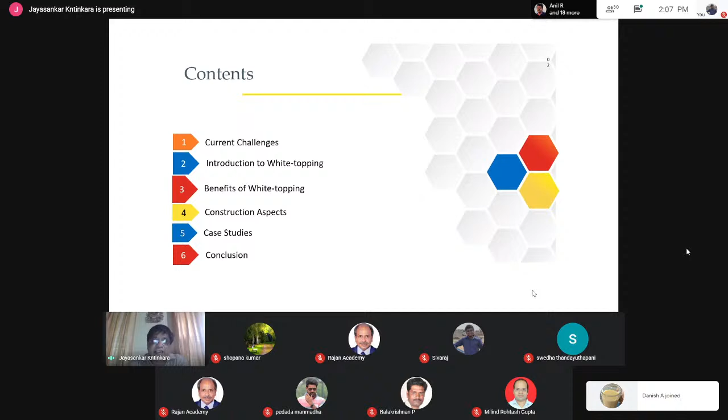So if you see the current challenges in construction, especially in the road sector, especially city roads, this is a common problem. After every rainfall, you've seen this - though I've shown here a Mumbai pothole, it is applicable to every city, whether Bangalore, Chennai, Hyderabad, or any city. After a heavy rain, one of the major problems is potholes.

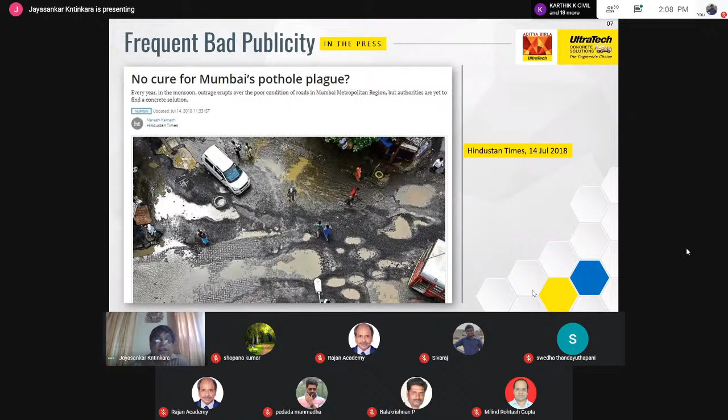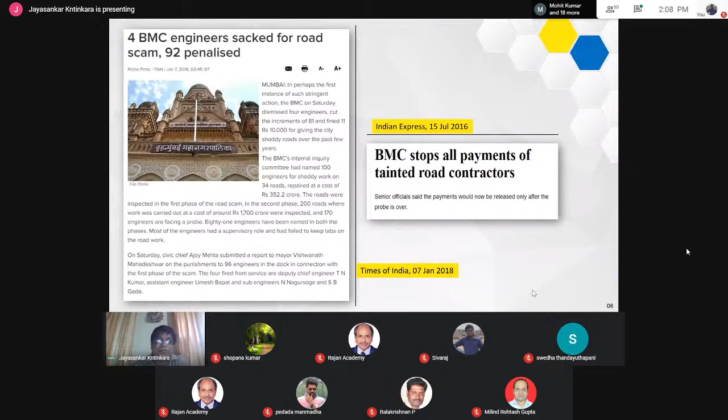The problem doesn't end there, because when it comes to potholes and bad roads, there is a lot of hue and cry, and the bureaucracy asks questions - why this road, laid just 1 year or 1.5 years back, has gone to such a bad shape. People protest because they have to commute through these roads. So a lot of protest takes place, traffic becomes very slow, there may be some accidents, and some may even be fatal.

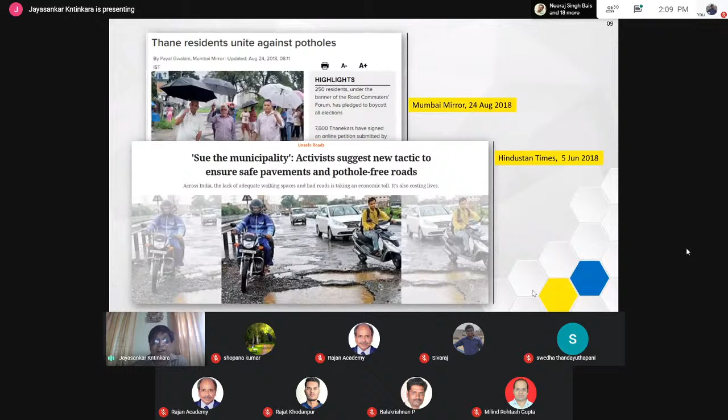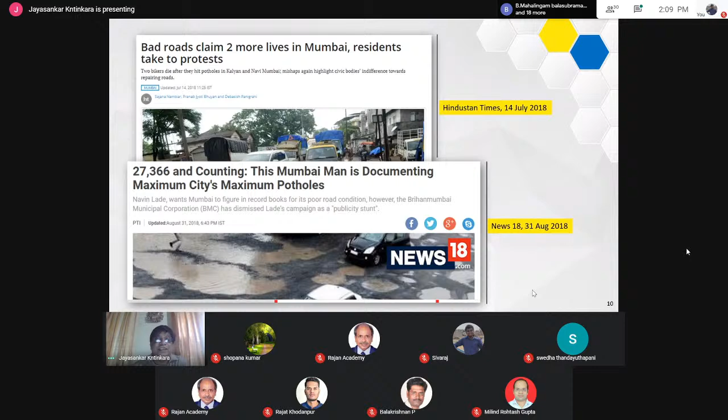Adding to this problem, many times people go to court, and the court will ask the bureaucracy. Recently we have started a new trend: people are counting the potholes, and they have to give a report on how many potholes they have filled to the court.

So if you want to make a case for a better road, first is the basic problem in city roads because of potholes - it's a public inconvenience. When potholes are there, traffic gets slow because drivers have to either avoid the pothole or slow down to take it through. Second thing is accidents, and some may be fatal. So this creates a lot of problem for the public.

Another big problem for the public is, for example, some 10-15 years back we constructed a house and we might definitely see that our house is above the road level. But due to very frequent overlays happening in the city, the road level goes up and the building comes down. This was clearly witnessed during the 2015 floods in Chennai. Many apartments constructed 15-20 years back, or individual houses 20 years back, were maybe constructed 1 or 1.5 feet above ground level, but today they are about 1.5 to 2 feet below ground level. So during the floods, they had a lot of problems.

Nowadays there is a new technology coming from a Haryana based company - they are coming and lifting the houses to avoid this problem. So this is one problem, the public inconvenience.

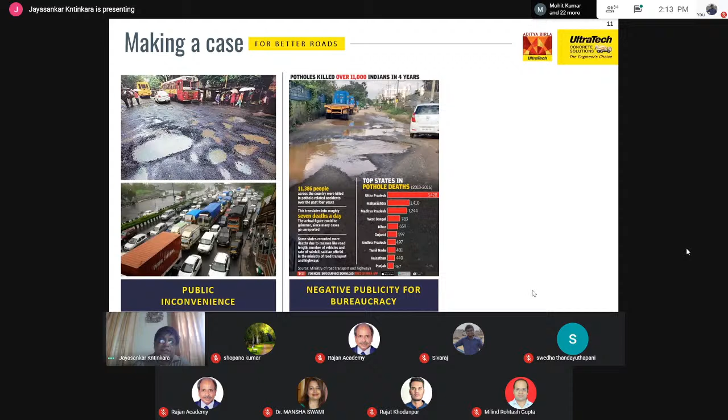After every rain, there are a lot of complaints about potholes. The third major problem is the recurring expense for the government exchequer.

In one of the meetings we had with some ministers, he was asking his chief engineer how much they spend per year for maintenance of a bituminous city road. So he told some 300 crores. Then the minister remembered, no, it's not 300 crores, it's much more than that. So finally the number came to about 800 crores because of some other reasons also they have spent something.

But this money, if constructed into new roads where maintenance expense is less, you can build more and more infrastructure. So recurring expense on maintenance of the road is also a concern.

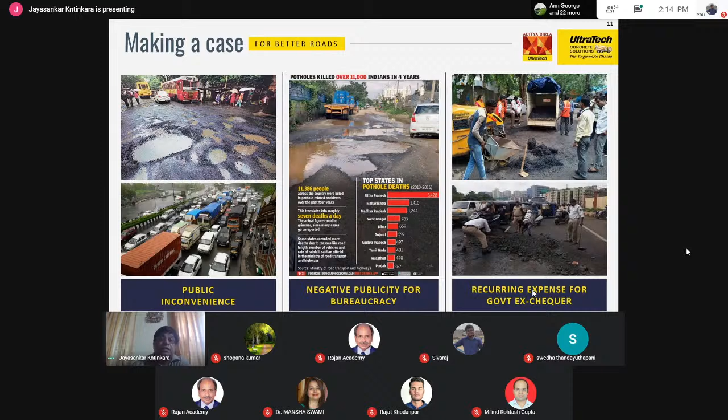So with this concern, I'm going to give a solution for especially the city roads, which is the introduction to white topping, and why white topping is required.

So if you see a bituminous road, you have a subgrade, and then you put the asphalt, bituminous concrete over it. In a rigid pavement, you have a full concrete road. But the problem with the full concrete road, why people didn't go for rigid pavement, was because the cost was very high.

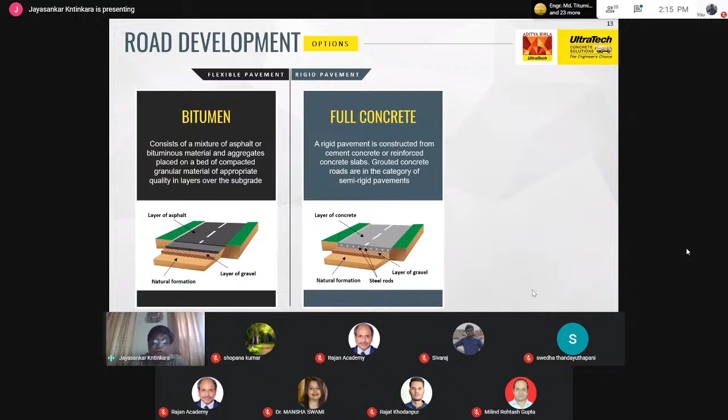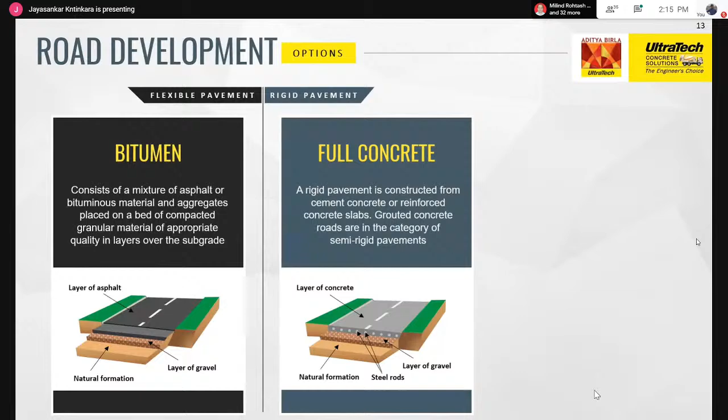The initial cost is high, and as I told earlier, political parties come for 5 years and look into not the quality of the road, but how many kilometers they can lay with the budget they're having. So here is a big disadvantage: if you build a concrete road you can lay say 1 kilometer, but with the same budget as a bituminous overlay you can put some 3 or 4 kilometers. So that is the disadvantage.

And bituminous overlays are done very fast, whereas a full concrete road takes a huge time to complete. So is there an alternative? Because city roads, due to water logging and other issues, bituminous roads are a problem, but full concrete roads have disadvantages too.

So this technology that has come is an in-between technology called white topping, where if you have a good layer of asphalt - because of overlays, sometimes in many roads, especially at the center of the road, you can get almost 3 feet, 4 feet of asphalt road.

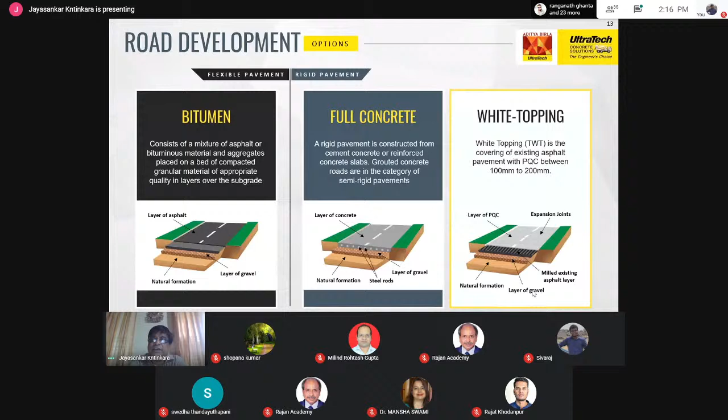So wherever there is a good thickness of asphalt road, can we have an overlay of concrete which is of lesser thickness and with no reinforcement? Normally a concrete road will have reinforcement. And that is how this white topping technology started.

Ultratech's vision from the beginning is to be the leader in building solutions, meaning we can be a solution provider. So from a small house construction to many bigger constructions, we get involved wherever cement and concrete is there. White topping was one such technology.

We thought we will take it up, create awareness about this technology, and promote it. That's how we started the first demonstration project of white topping in Madiwala, Hosur.

Then we did a demo project in Chennai for Velachery Road, then one demo in Banjara Hills Road at Hyderabad, and we had some roads constructed in Jaipur. Today this technology is catching up, and especially in Bangalore, it has become a household name: white topping.

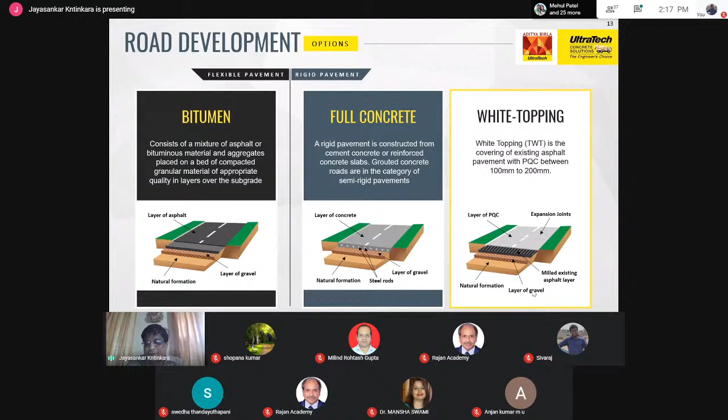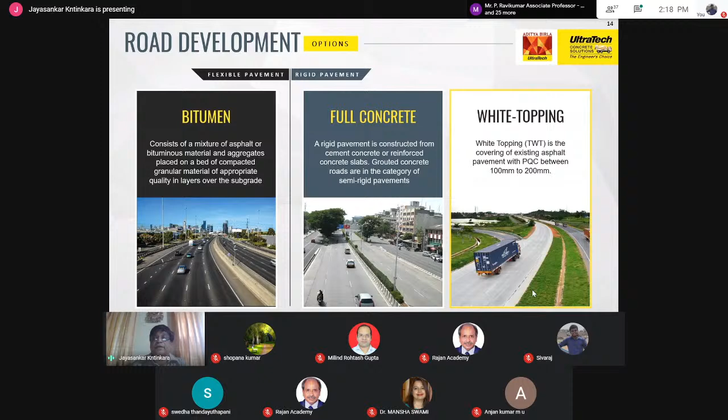So you have guidelines, IRC SP 76 2015, which defines white topping. White topping is covering the existing asphalt pavement with PQC, pavement quality concrete, and can be used where traditional asphalt pavements have failed or deteriorated. You don't have to remove the full asphalt - take it as the base layer, and over that you put a thin concrete layer with short panels.

Mainly, if you see the difference between a concrete road and a white topping: normally concrete roads have long panels, typically 3.5 meters wide and 4 meters long, done with a bigger joint. Whereas here, it is all 1 meter by 1 meter slabs with lesser thickness.

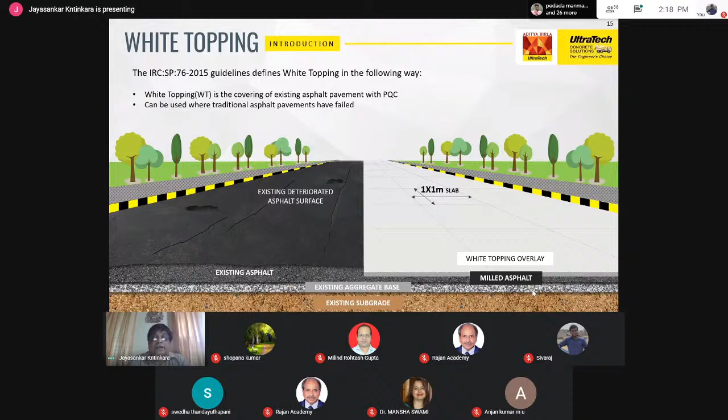So this can be easily done, and there is no reinforcement here. The existing road is utilized as a subbase, and the asphalt layer can simply be milled, and a new concrete overlay is constructed on the milled asphalt surface.

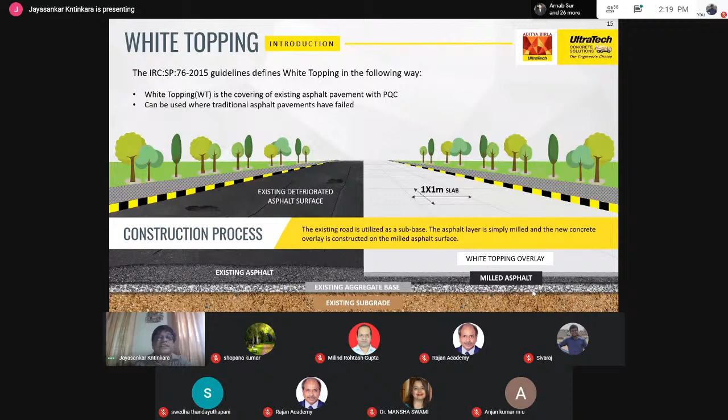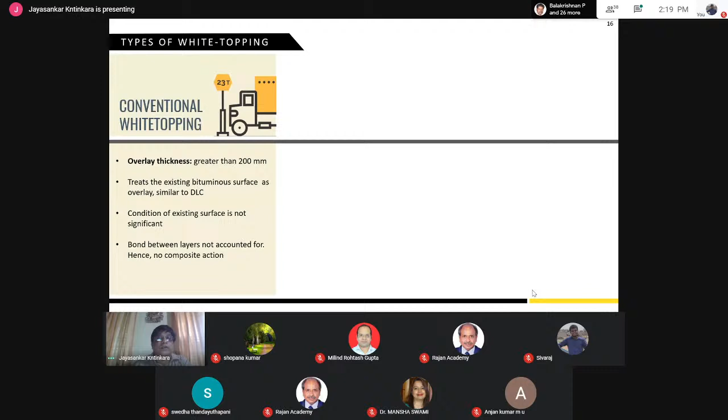So there are three types of white topping. One is conventional white topping, where the overlay thickness is greater than 200 mm. The commonly used white topping nowadays in city roads is thin white topping. Conventional white topping can be used for highways, like what we have used in Nice Road. Thin white topping has an overlay thickness between 100 to 200 mm, that is 4 inch to 8 inch.

The bond between layers is considered, but it's not mandatory, and not considered in the design. Earlier, it was thought that this bond could also be taken into account, but later, when the code got revised, we found that this bond is not going to be there forever. So nowadays, bond is not considered in the design. High strength concrete M40 and above, with fibers and without fibers, can be used.

And the most important thing is joints are at shorter spacing. Normally, we do 1 meter by 1 meter panels.

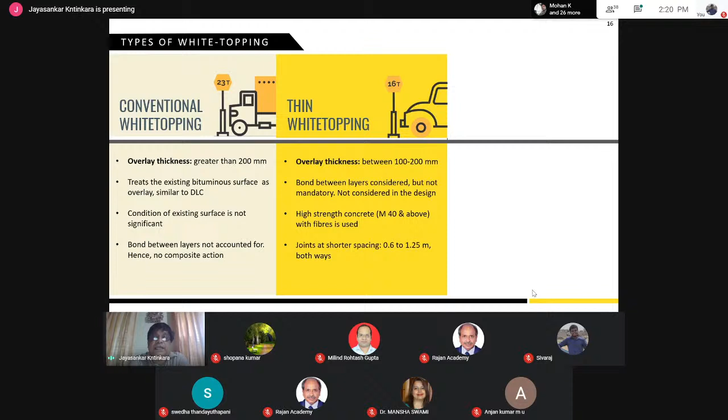There is also another white topping called ultra thin white topping, which is for light vehicles, not recommended for Indian roads. It's suitable for interior roads of a colony or similar areas where traffic is not heavy. This is less than 4 inch thick, and the joint spacing is again small - they do 0.6 to 1.25 meter based on the design.

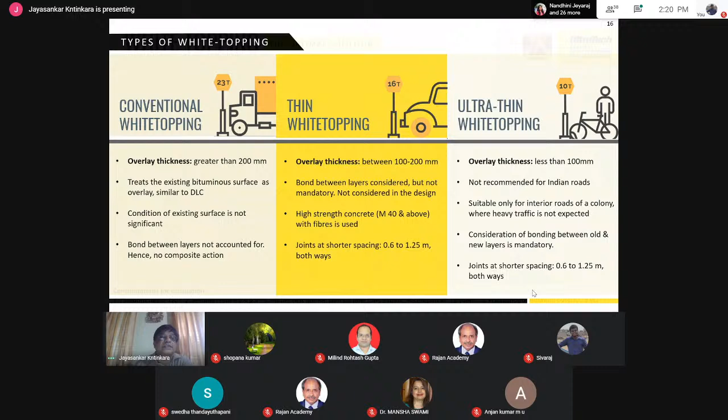Any questions so far, or shall we take the questions later?

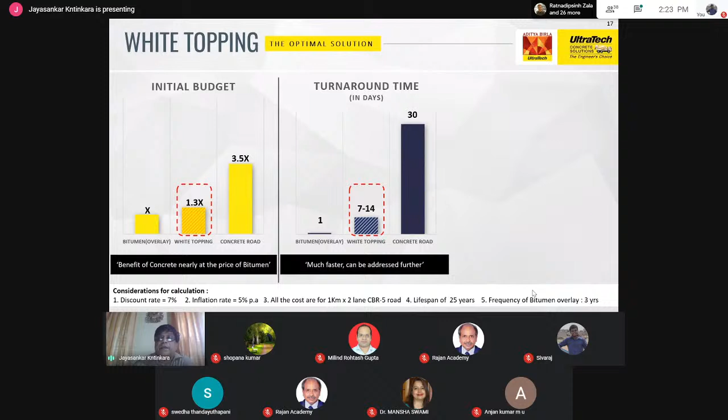But the biggest advantage of the concrete road is its life cycle cost. For example, if you take a 25 year life cycle, for white topping the life cycle cost will become 1/5 of the bituminous overlay, whereas for concrete road it will be about half of it, mainly because there is no maintenance, or very little maintenance, as far as concrete roads are concerned.

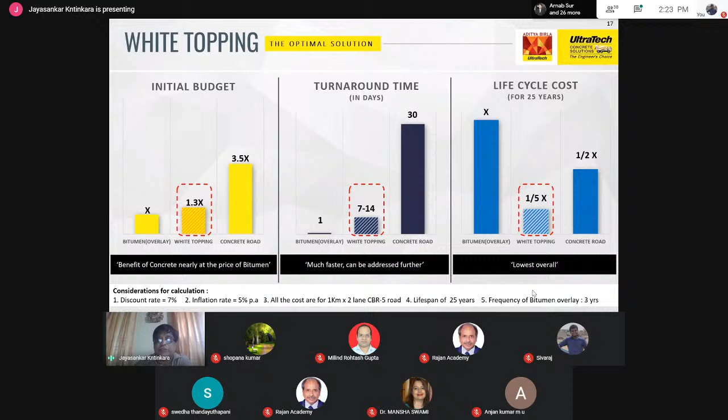And again, when I say concrete road maintenance is less, I mean a properly constructed concrete road, because you have to be very careful when you make the concrete - the PQC and laying execution should be good. For white topping, wherever applicability is there, even a deteriorated bituminous road can be used as a base.

The only thing is that we have to design it properly, taking the K value and other factors into account. So mostly, with our experience, we have seen that many roads with 6-inch white topping are normally used in all places, and it is working very well.

So how do you construct this white top road?

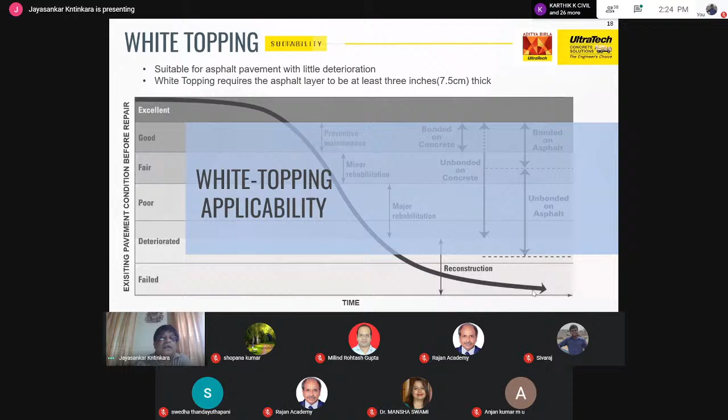First is, as I told earlier, the milling and profile correction. It's very important to do the profile correction because since we are designing a 6-inch road, if your profile correction is not good, in many places the PQC consumption will increase. So milling plays a major role in profile correction so that a uniform thickness of the road can be maintained, and wherever we find difficulty, DLC, dry lean concrete, can be put and the profile correction can be made. So surface preparation is very important so that the cost will not increase because of the higher thickness which we unknowingly will do.

Now for concrete overlay, normally we recommend pavers, and the ideal one is the slip form paver. But there are 3 methods people are using. One is they use a screed vibrator. This is the lowermost technology. We recommend 2-3 things when you do a concrete road. One, preferably we recommend RMC, ready mix concrete, where timely and faster supply can be made, and the quality of the concrete will also be better. So site mix concrete or machine mix concrete at site, we don't recommend for concrete roads.

Second, we recommend a paver, and there are 3 types people are using. One is a screed vibrator. Definitely it gives better performance, but not good riding comfortability, or the quality will not be as good as a paver. So there are 2 types of pavers available now.

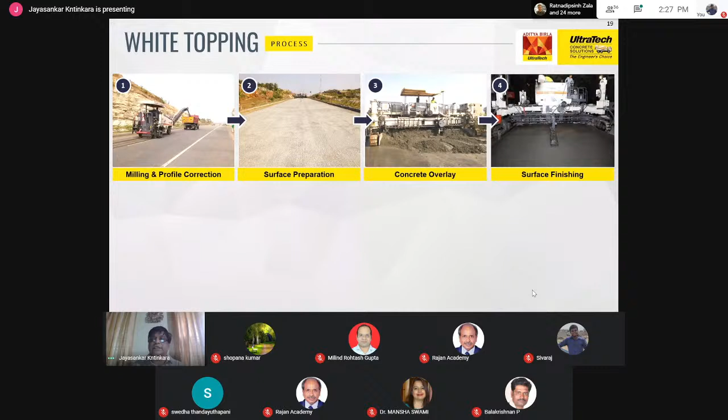The machine will also have a texturing attachment nowadays, where the machine itself does the texturing to give a rougher finish. And if the machine does not have it, we use rods with a brush to give the texturing for the concrete.

This is one of the most important parts of white topping: the groove cutting process. You should have a sufficient groove cutting machine, because as I told earlier, we are putting M40 grade concrete, and normally the 1-day strength will be somewhere around 18 to 20 MPa. So within 8 to 10 hours, you should start the groove cutting, and the grooves are normally cut to 1/3 the thickness of the concrete. So if it's 6-inch thick, we cut a groove of about 2 to 3 mm width and a depth of 2 inches. The idea of groove cutting is to make shorter panels so that any shrinkage cracks happen inside the groove and not outside.

So it's very important how fast we do the groove cutting, because if you delay the groove cutting, then you cannot have proper groove cutting. The blades will get broken very fast.

So ideally, we should have prepared with extra machines available with us in case one machine is not working. There should be an alternative machine, and more groove cutting machines are kept to ensure this process is not affected and no time delay happens for groove cutting.

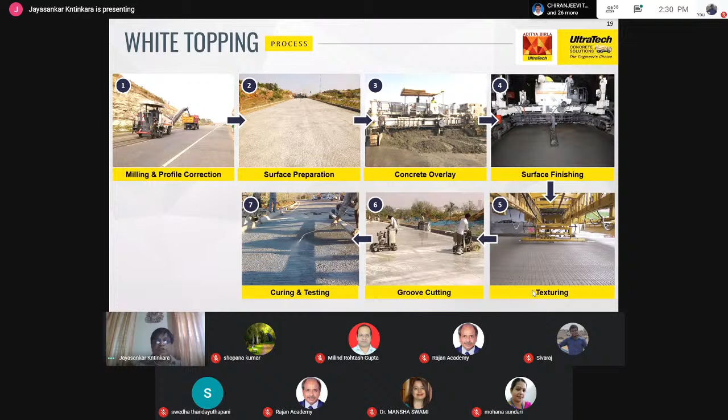So what we do is use normal curing with Hessian cloth, or in some places we use polythene sheets also, in case curing compounds cannot be applied. We immediately cover the concrete with thin polythene sheets so there is no evaporation, avoiding plastic shrinkage cracks. Finally, you have to do all the testing - concrete strength and all the things.

And finally, the road is like this. So this is a very simple method - nothing much is there. You have only PQC, no reinforcement. But if you are going for an alternate lane, for example 3.5 meters, the only reinforcement you have to provide is the tie rods to have a joint between the adjacent lanes.

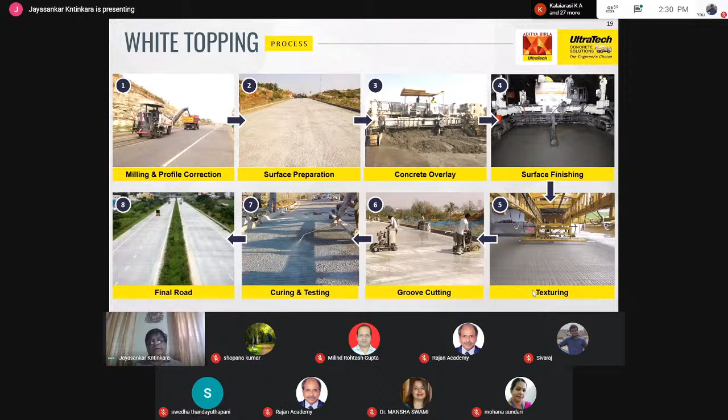Now coming to the benefits of white topping. The first benefit, as I told earlier, is the life cycle cost. The average maintenance period of an asphalt road overlay is around 2 to 4 years, but in many places we have seen that every monsoon, after the monsoon, there is an overlay, especially if it is a VVIP road.

With white topping, as we see here, absolutely there is no maintenance required, and we don't even fill the grooves with sealants, because our experience has shown that dust will fill them automatically, since there is no reinforcement along the road. So nothing is going to happen - the dust can fill those grooves and that's it.

Earlier, when we did the demo project, we were using sealants and filling them, but that had not much effect based on our practical experience. Nowadays on the roads we don't fill any sealants either. So there will be absolutely no maintenance, except in some areas if it is not properly done - some cracks, some spalling.

This has to be addressed because today we have high strength grouts and all such things available. So if there's any small problem due to improper work, you can cut out that panel, remove it, and put re-concrete, allowing traffic within 4 to 6 hours. That type of high strength grout and concrete is available for repair works also, in case we don't do a proper job and something happens to that concrete road.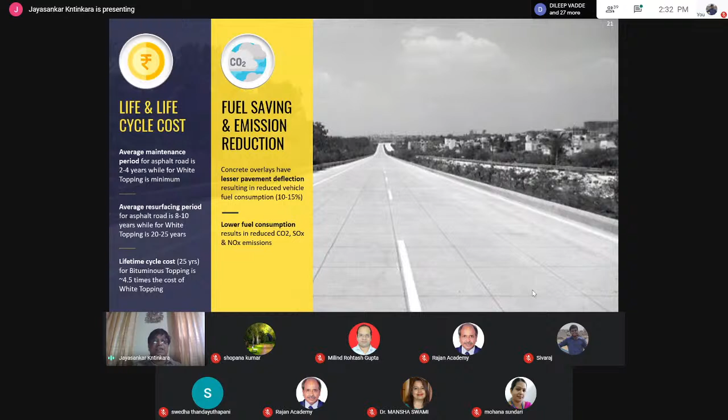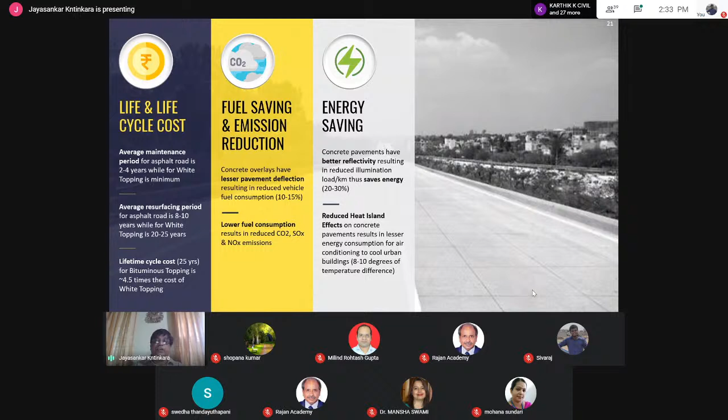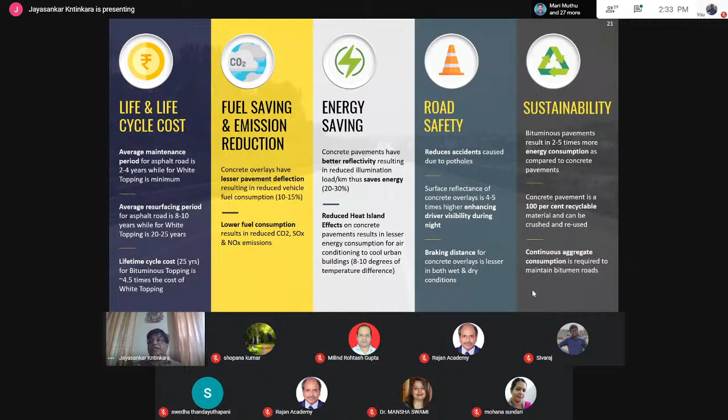The other advantage of concrete roads - not only white topping, but concrete road overlays in general - is that it saves a lot of fuel. We'll see in the next slide how this is possible. There's also energy saving because of better reflectivity, which saves energy through better lighting, and it also reduces the heat island effect, which we'll see later. There's road safety - reduces accidents - surface reflectance, braking distance, and it is also sustainable. So these are the basic advantages of the white top road, and we will see them one by one.

So for life cycle cost, if you take a new road and compare an overlay - asphalt overlay we have taken around 71 lakhs, and concrete overlay, that is white topping, is around 98 lakhs. So it's about 30% more.

But if you see the design life, though I have put bituminous at 3 to 5 years, it's actually much less than that. But definitely for white topping, you can have a 20 to 25 year design life, with minimum maintenance, or maybe I can say nil maintenance.

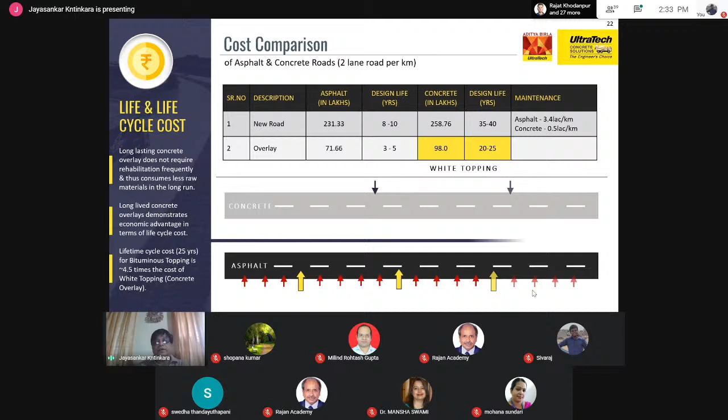This will definitely help, because nowadays many other projects are working on life cycle cost basis and not on the initial cost. Wherever life cycle costing is calculated, white topping definitely has a much bigger advantage, because as I told earlier, almost one-fifth of the overlay cost will be coming in the long run.

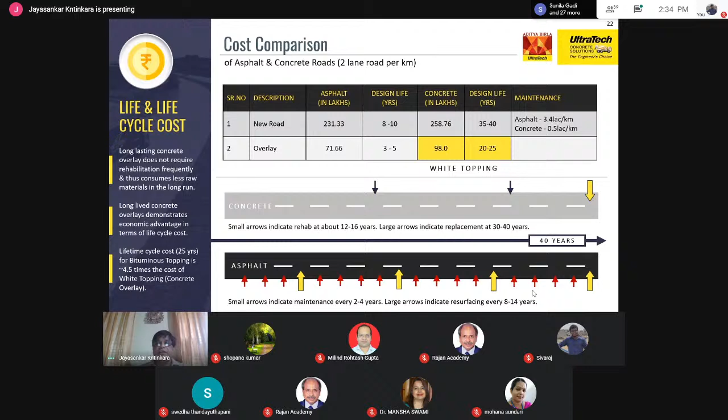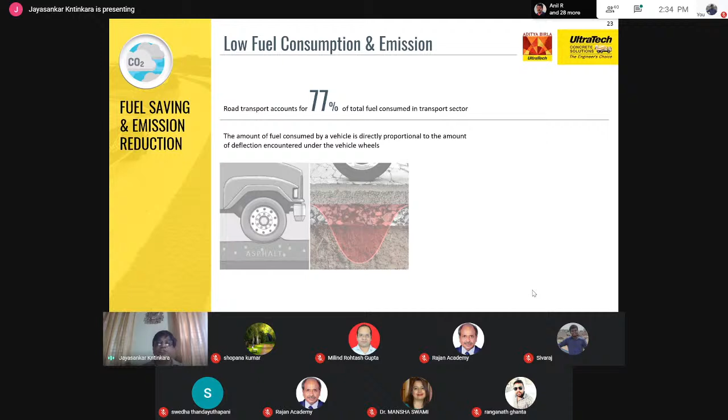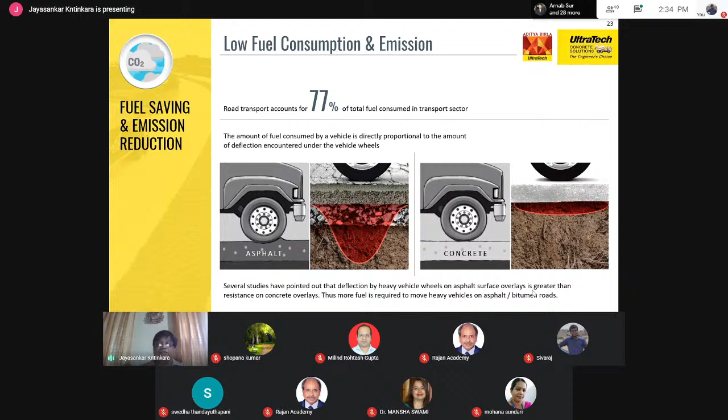Fuel saving and emission reduction are especially important because road transport accounts for 77% of the fuel consumed in the transport sector. If you compare a flexible pavement and a concrete pavement, the deflection in the flexible pavement is much higher. Especially when the vehicle moves, there is resistance for the tires when there is deflection, but in a concrete road, since it's rigid, we don't have that.

This is one of the studies done by CRRI and Dr. Kadiyali and associates. They found that especially in heavy vehicles, 25-tonners and so on, the savings in fuel is almost 15% in heavy trucks moving on concrete roads. For lighter vehicles, not much savings will be there, but whenever heavy vehicles are moving, and most of our utilities and goods are transported through heavy vehicles, there is a tremendous saving in fuel compared to bituminous roads, and it also reduces emissions.

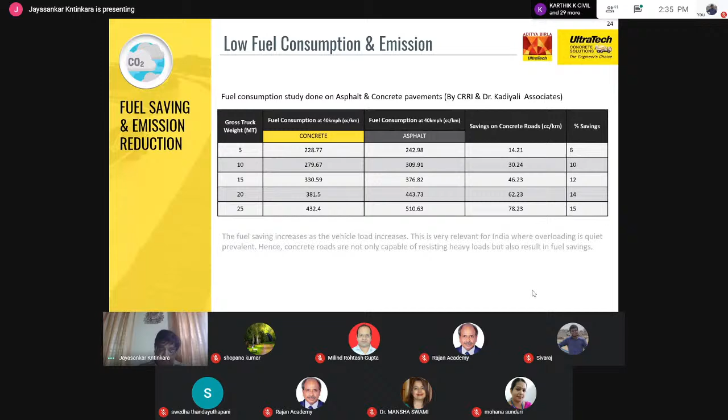Now, energy saving - this is about reduced heat island effect. I want to mention that when we did white topping in Mysore around the temple where the Dasara festivals are held, all the surrounding areas near the palace were white topped. There was a press article that came out saying that when the elephant parade goes around that temple, the elephants face very high temperature and are not able to walk on the concrete road. But basically, we have already measured the temperature and done enough studies on that.

A concrete road and a bituminous road adjacent to each other, definitely in the summer, maybe at 12 o'clock when the sun is overhead, if you measure the temperature, you can see that the bituminous road temperature will be around 8 to 10 degrees more than the concrete road temperature. So actually it is the reverse, but some media reported that elephants are not able to walk because of the temperature of the concrete road. Actually, it's a myth.

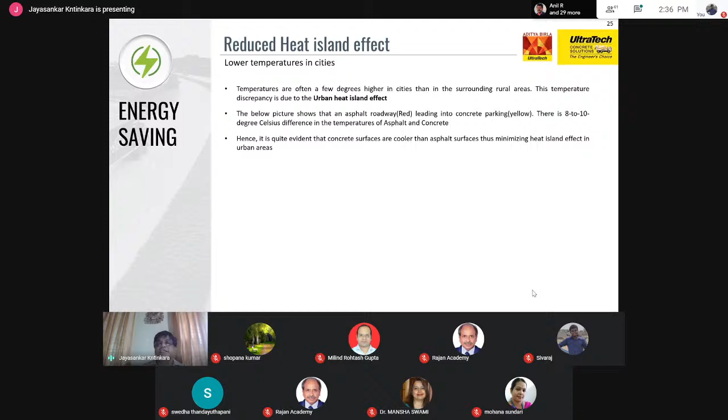If you measure the temperature, there is definitely a big drop because of the reflection of sunlight, since black surfaces absorb more heat and also hold the heat. So there is definitely a reduced heat island effect, and it's quite evident that concrete surfaces are cooler than asphalt surfaces, thus minimizing the heat island effect in urban areas. The night temperature wherever concrete roads are present will also be less.

Road safety - as I mentioned, major accidents are basically because of potholes. A lot of accidents take place, and a good concrete road, especially in cities, can reduce pothole problems and result in fewer accidents.

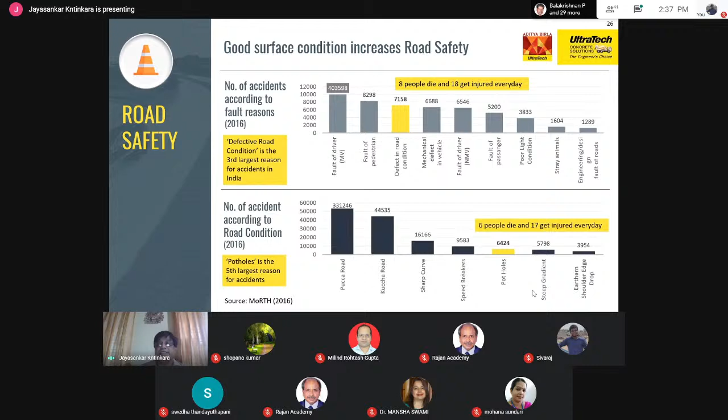This again relates to reflectivity, as I mentioned, for the lighting arrangement. When you compare a black top and a white top road, there is definitely more brightness on the white top road, and there are two ways we can calculate this benefit. In many places, you can reduce the pole gaps, the spread between the poles. Suppose the electric poles are placed at every 6 or 8 meters, you can increase that spacing and still get the same light, or you get better lighting on a white top road compared to a black top road for the same pole spacing.

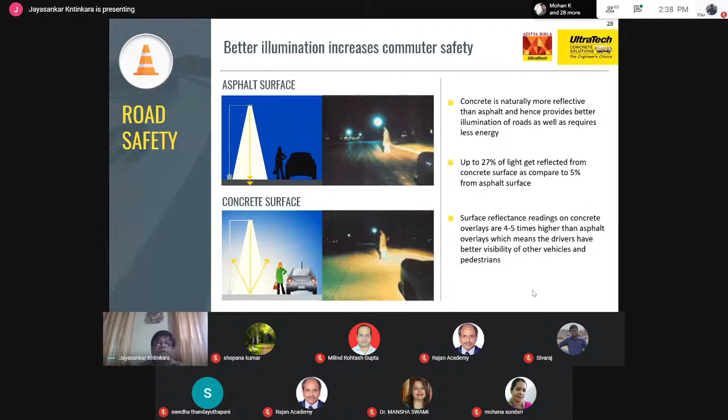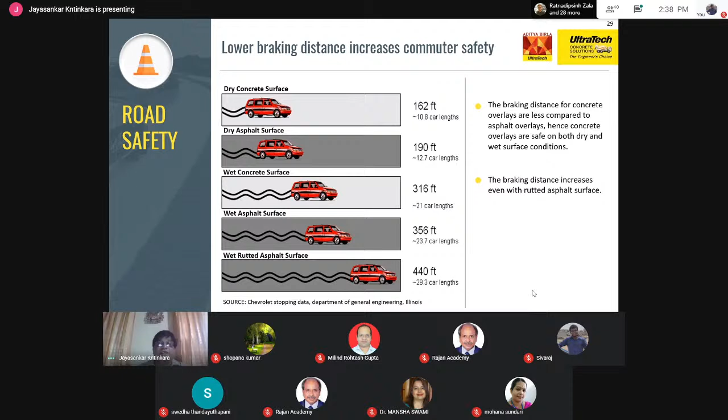This is again one of these articles. We have not done this test so far, but normally people believe that concrete road braking will be a problem, especially on wet concrete roads. But a study from the Department of General Engineering, Illinois studied braking distance and found that on wet concrete surface, braking distance is about 316 feet, whereas on wet rutted asphalt surface, it's about 440 feet. So this is a good study on how braking distance on concrete and bituminous roads can be studied further to understand this better.

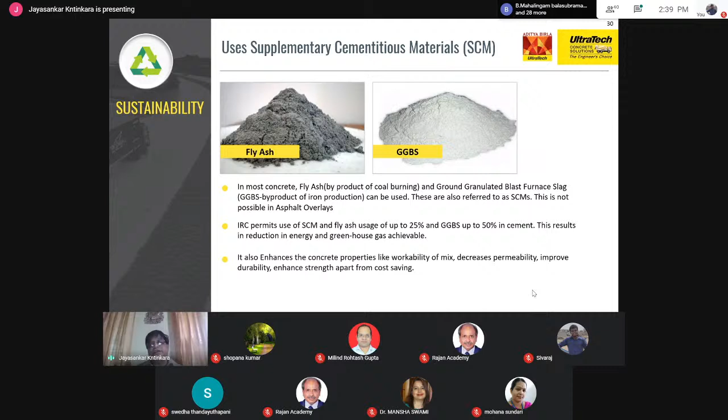Sustainability in concrete: first, it does not have to be heated like bitumen. Also, a lot of mineral admixtures can be used in concrete, like fly ash, ground granulated blast furnace slag, etc., as supplementary cementitious material, which is not possible in asphalt overlays. IRC permits usage of 25% fly ash and 50% GGBS. This will not only improve the quality of PQC but also add a sustainability angle, since otherwise these would be waste materials that cannot be used, byproducts from thermal power plants or steel plants.

The third thing is, concrete is a recyclable material that can be crushed and reused. This also increases the sustainability angle, and recycling of concrete is going to be a future topic. Some plants have already come up, in Delhi and elsewhere. CPWD has put up a concrete recycling plant where concrete can be separated, cement separated, fines separated, and aggregates separated. Many times these aggregates are reused, because aggregates are natural material and we have to preserve them from a sustainability point of view. So it's good from a sustainability point of view also.

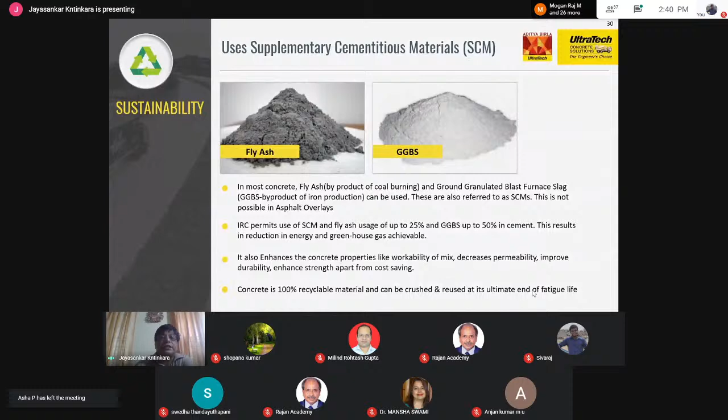Now, building the ideal road: when doing a concrete road or white topping road, the first thing is better planning. Because once you plan and lay the concrete road for 25 years, you cannot do any cutting in it. Whereas with a bituminous road, you can see that water supply people or electrical people will cut it within a week.

But in a bituminous road, overnight, who is cutting it, we don't know. They will come and cut it, and they will fill it. Sometimes they will not fill it also. They will just lay this and go off.

So proper planning when making a white topping road or concrete road is very important. Integrated planning for all utilities should be done properly, with better standards of design, drawings, and data, and all agencies putting utilities should participate, designing based on proper ground analysis. You have to understand exactly what is there, and then do it, because once done, you have to take utilities through the utility ducts we are providing.

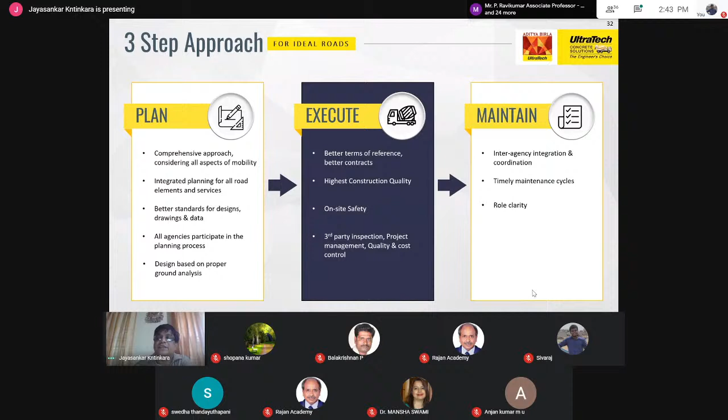Execution: as mentioned, concrete has to be laid properly with the highest quality construction, because once there's any goof-up in the concrete, it's as good as bituminous. Any badly constructed road, whether bituminous concrete or cement concrete, will have problems. So high quality construction must be maintained, with third party inspection, project management, quality and cost controls, and timely maintenance cycles and role clarity.

Now, if you see the traditional approach to roads, you construct a road and go on widening it, widening in such a way that the pedestrian has to walk through the road. This is the general trend.

Utility ducts with no planning, no drawings of the road, and different tenders given for different things, so there is no coordination. This is one of the proposals which recently happened on Residency Road, Bangalore, where a lot of importance is given to pedestrians, with a huge space for them to walk.

The trend has already started where people coming to the office would prefer to come by bicycle. Otherwise, pollution in the cities is going so high, and there are traffic jams. So we should encourage bicycle lanes.

Motor lanes should be a uniform 3 meters wide, with entry, exit, and utility ducts maintained. In many foreign countries, utility ducts are constructed and given on a rental basis to agencies who want to use them, so there is a rent if you want to use it directly.

So this type of thing we should think of: asset mapping, pushing utilities to do it, and a single tender for the complete work, including the lightings.

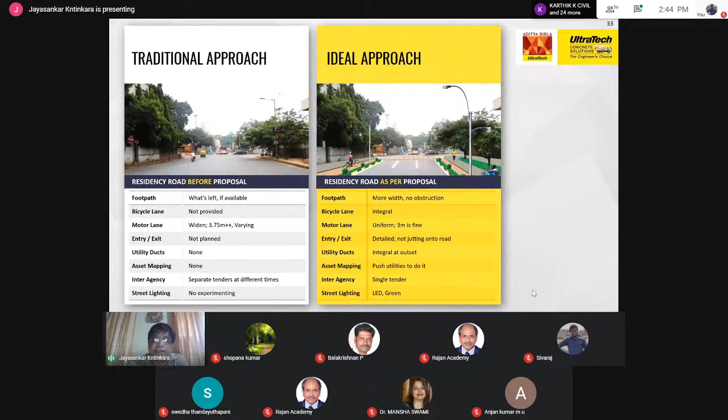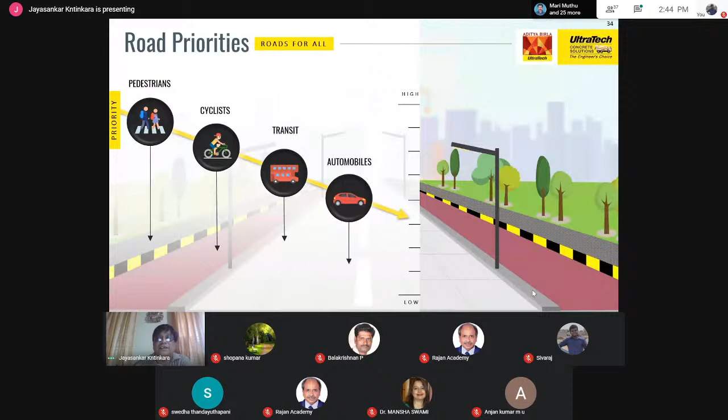So these are the priorities. The first priority for a road should be the pedestrians; you should give sufficient walkway for pedestrians. Cyclists should have a separate lane. Then transit, for example heavy vehicles—we cannot avoid heavy vehicles moving and transporting essential commodities. And then for the automobiles.

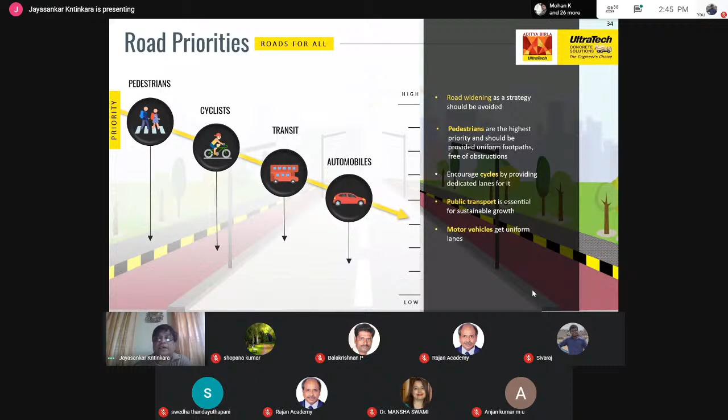So these are some of the utility ducts which can be planned, whether it is municipal water, gas, sewer, power, stormwater drain, street light power, etc., which can be planned at both ends.

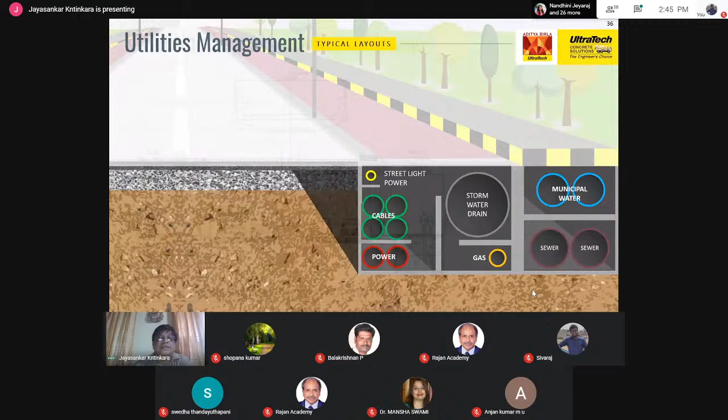Now we have to accommodate one more thing: the metro rail. In all cities you have metro rail. Either the metro rail will go through the center of the road, where a typical cross-section design can be something like this, or if the metro line goes through the side of the road, we can have a different cross-sectional design for that.

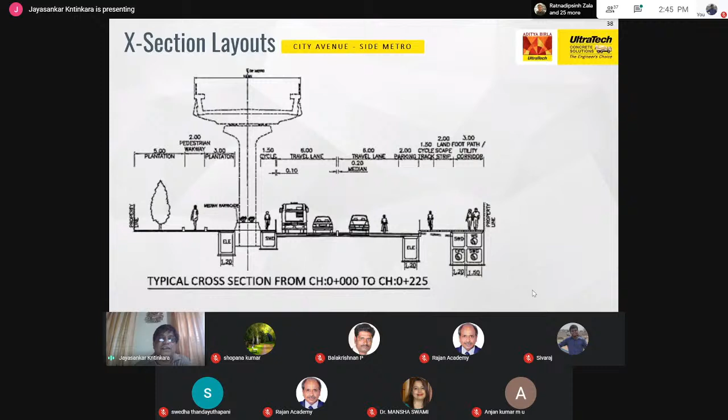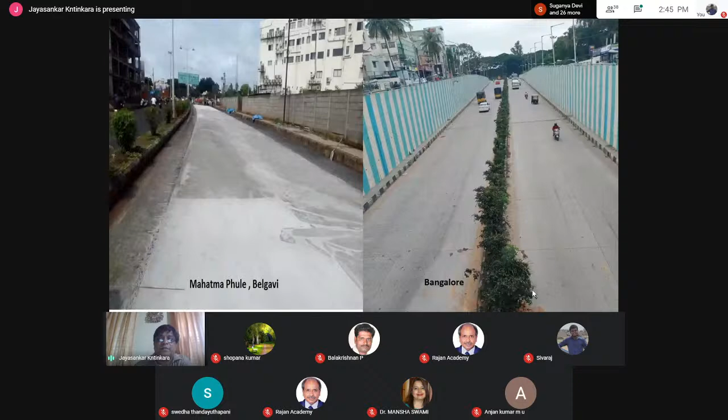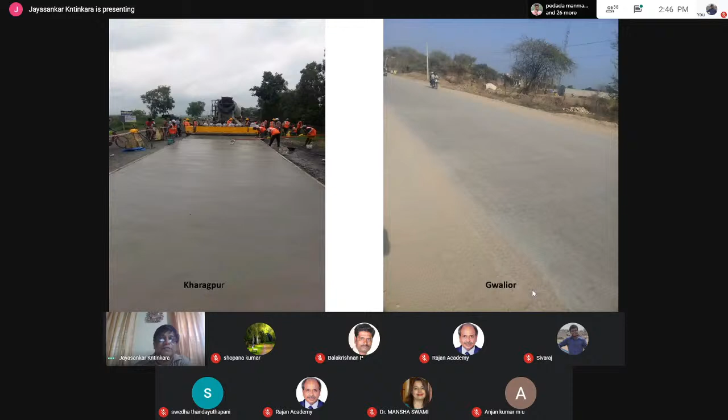So just before winding up, I have some case studies. We have done white topping in many places: Belgaum, Bangalore, Daman, Navi Mumbai, Nagpur, Ghaziabad, Aurangabad, Kharagpur—this was done by IIT Kharagpur as a first pilot study—and then Gwalior.

So I'll go through a case study of a highway road constructed in Bangalore using white topping technology. This is the first white-topped highway project in the country, with almost 90 lane kilometers, making it the longest white-topped road in the country.

It was the first white-top project on a PPP model, designed for heavy traffic and for 60-plus years of life, completed in a record time of 120 days. These are the design features considered for the project, using codes IRC SP76 and IRC 58, all considered in the design aspect.

This is a mix design, especially for the PQC, with a cement content of 430 kg and a mineral additive, slag, of 60 kg. We added fibers and admixtures, including superplasticizer, and the grade of concrete is M40, with a target mean strength of around 48.25.

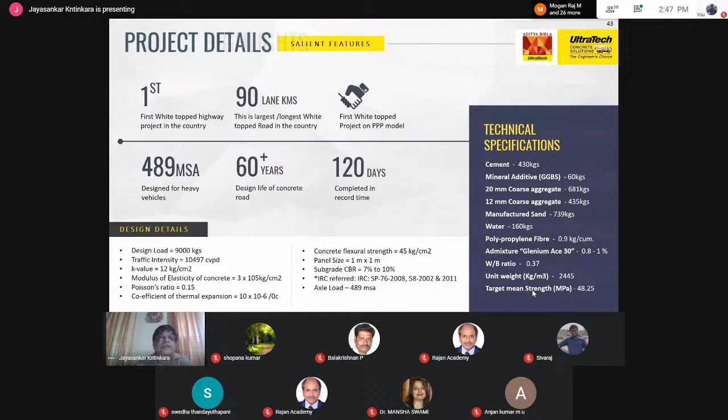The design was done by Dr. Kadiyali and Associates, New Delhi, as per IRC guidelines. The project consultant was Mr. Sathendra Kumar of the Central Road Research Institute, Delhi, and the project owner is Nandi Infrastructure Corridor Enterprises, Bangalore. This peripheral road is 4 kilometers long and 11.4 meters wide.

The thickness of the white topping, since heavy traffic is involved, we went from 6 inches up to 180 mm, which is slightly more than 7 inches.

Concrete was designed and supplied by Ultratech Concrete, Bangalore. We set up an exclusive batching plant, and also supplied concrete from our 2 commercial plants. The slump of concrete, as I mentioned earlier, was 20 to 30 mm because we were using a slip form paver.

The result: although it was M40 grade concrete, the compressive strength we achieved was around 62 to 65 MPa at 28 days, with a flexural strength of 6 to 7.5 MPa.

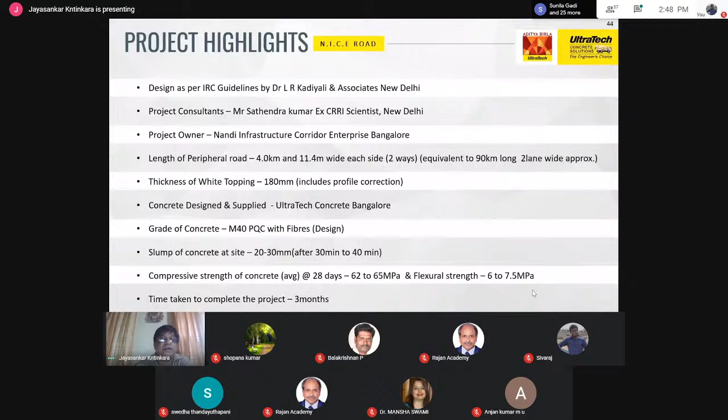The total quantity of concrete used was about 60,000 cubic meters. We set up a batching plant with a capacity of 100 cubic meters per hour exclusively for this project, supported by 2 of our commercial plants which were supplying ready-mix concrete.

A slip form paver of 8.5 meter width was used, 2 numbers. Groove cutting machines, about 6 to 8 numbers, were deployed. As I told you, it's very important to have the exact power supply and enough groove cutting machines and blades kept ready, because if that doesn't work and the concrete gains strength, it becomes very difficult to cut the grooves.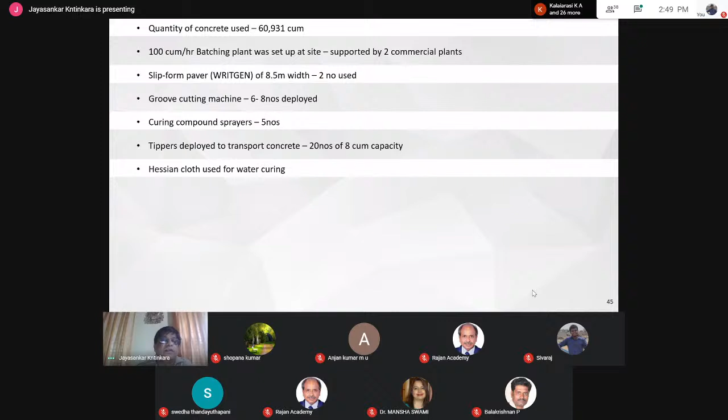Curing compound sprayers were used, enough for the initial curing, spraying to avoid plastic shrinkage cracks. Tippers were deployed because slip-form pavers were used. Slump of concrete was 20 to 30 mm, so concrete had to be transported through a tipper or dumper. Hessian cloths were used for water curing.

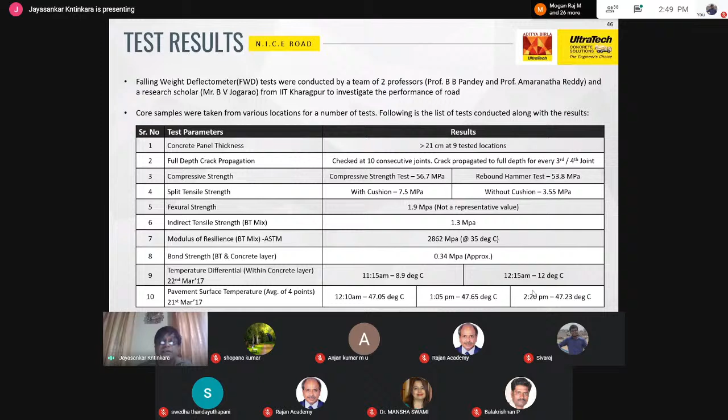After 4 years, Professor B.B. Pandey and Amaranatha Reddy from IIT Kharagpur conducted an investigation study for a research scholar. They took various tests after 4 years for these roads, and found most things in excellent condition, including the deflections. Compressive strength of the concrete was still 56.7. Therefore, it is concluded that the condition of the pavement was excellent after service for 4 years under heavy loads. Further studies can still be done, as this was the first project on a highway.

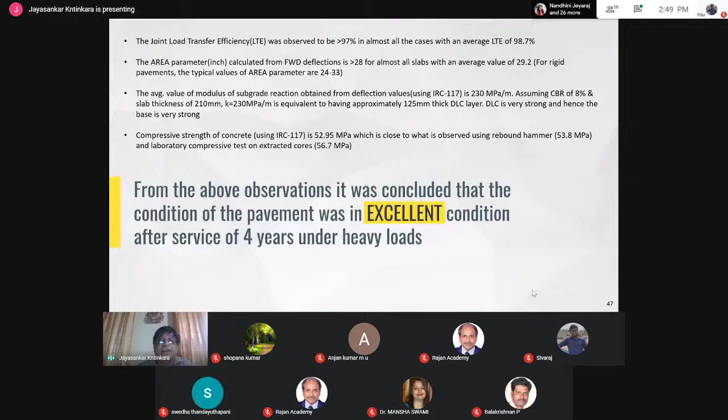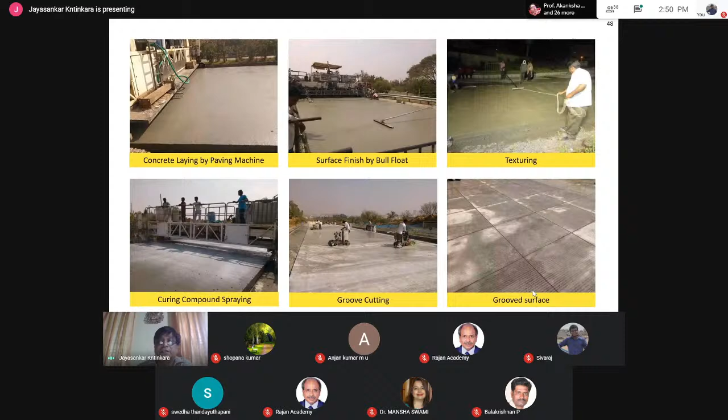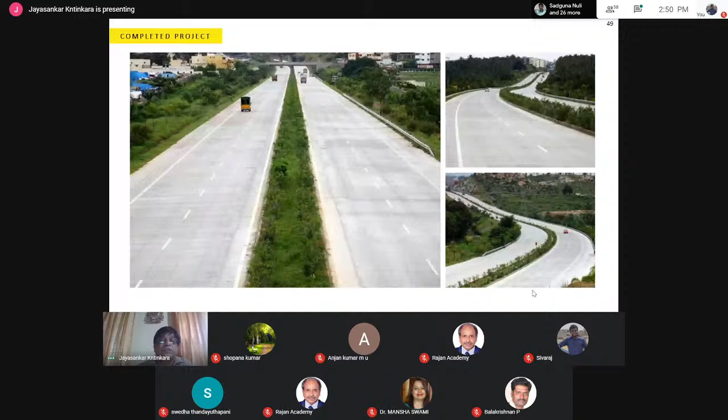So these are the various steps we have used for this project. And this is the final road, which you can see whenever you go to Bangalore, you can have a drive over this. It looks very nice, as well as this thing.

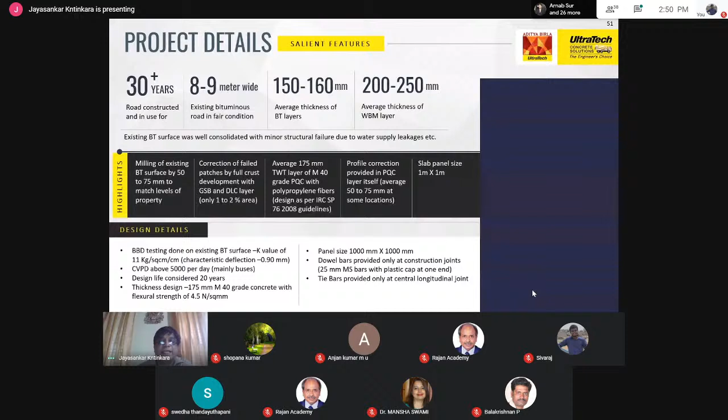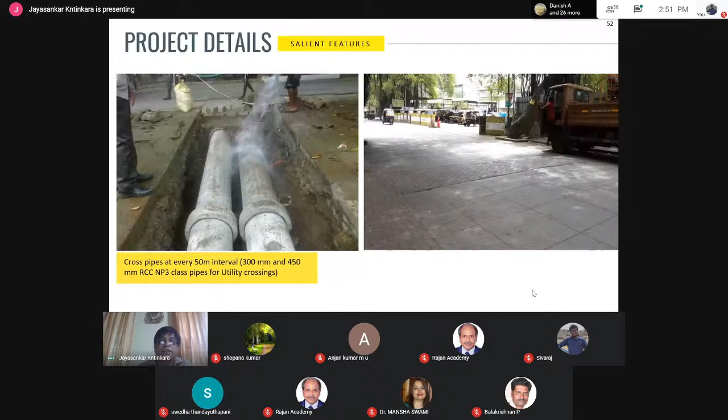Various types of utilities can be used for taking the utilities. Cross duct pipes at every 50 meter interval, and on the side we give paver blocks to take the utility through both sides. Cross ducts are provided at every 50 meter interval to take the utilities.

Now, to conclude, the role of Ultratech in this project, as I told earlier, breaking the myths of white topping versus bituminous road, especially in cities. It's not because of bad bituminous road laid, it is only because of heavy water logging that these pothole problems are coming. So we have to understand that we cannot avoid potholes in bituminous road when there is water logging.

So there's technology advance, cost advantages, environmental advantages, societal advantages. We are presenting this to various government agencies, and slowly many government agencies have started taking up these white top road projects, and once they started, they are continuing it. So knowledge transfer, we are part of the knowledge transfer process, taking technical workshops and seminars. We have got various consultants who now have experience in white topping.

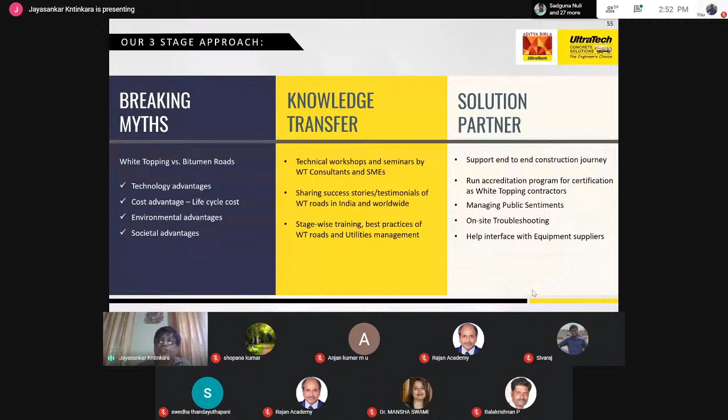We share the success stories and testimonials of white top roads in India and worldwide. Stage-wise training and best practices for white top roads and utilities management, and as a solution partner, support to the end-to-end construction journey. We are planning to run an accreditation program for certification of white topping contractors.

Whenever we started this white topping, one of the major issues was that they have to stop the traffic for some time. So this was creating a huge problem. I will give my example of this Velachery road when we were doing the white topping.

Both sides of the road there were apartments, and they had their cars. So we asked them to take the car and either keep it on the exactly constructed white top road so that they can take the car next day morning, or keep the car inside, because we are doing the side stretch, we cannot take the car out for the next 2-3 days. There was a huge hue and cry. People were telling, no, how can this be, I have got a 90-year-old mother, what will we do? So many questions were asked.

But I will tell you frankly, the reason the white top roads are completed, and when we go through the road, still we are the most welcome guests to them, and they used to offer us a cup of coffee. So that is the before construction and after construction experience of white top roads. One example I gave about Velachery road.

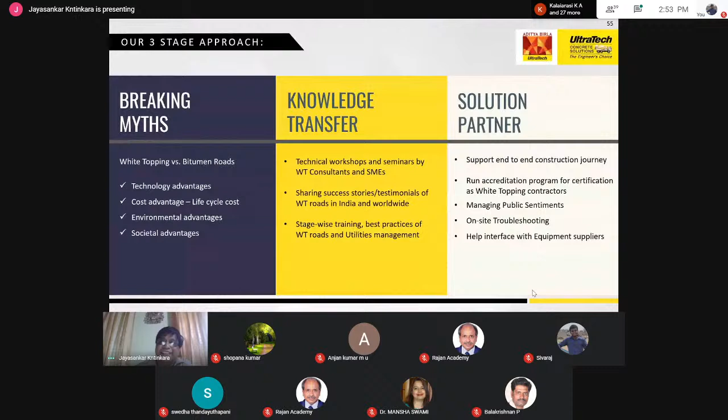Thank you, sir. Thank you very much, sir. It's very informative too. Participants, do you have any questions? You can just post your question in the chat box so that sir will clarify your queries. Please, you can ask your questions directly also or post in the chat box. Jayasankar is available to answer your queries.

I'm not a transportation engineering person, I don't have much experience in that field. Whatever I've talked about is based on practical experience associating with various government agencies on this product.

We can understand, sir, it is totally your given experiences. I just can understand, thank you, sir. Thanks a lot, very nice. Sir, please share your presentation also, it's very useful. Yes, I will, so that I can share it to the participants. Thank you, sir. Any questions?

Anyone? Sir, something has come. Are you able to see it, sir?